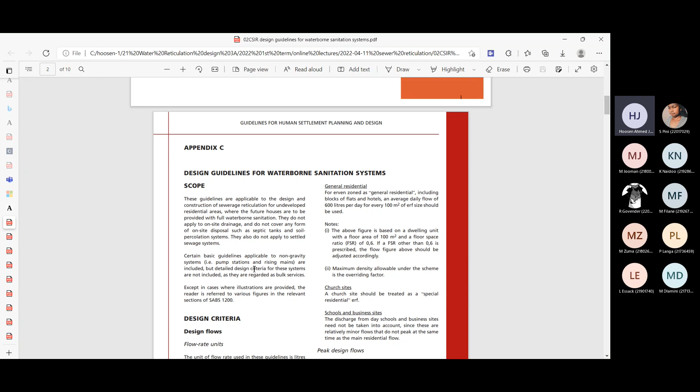On the Moodle website, you do have the full Red Handbook for the CSIR guidelines. If you want to read the remainder of it, you can go through it. The sections I've omitted, when it comes to sewer reticulation, are about the level of reticulation that's provided, which may vary. You could have, for example, pit latrines, septic tanks, or proper sewer reticulation systems like the ones you are going to study.

That's where we have waterborne sewage treatment, basically waterborne sewage reticulation. In the pit latrine, that's a dry system, used where you do not have proper sewage treatment plants or facilities, or there's no water supply - then that's inevitable and has to be provided. It does have its drawbacks.

We've all heard about incidents at schools where things have gone horribly wrong with septic tanks. But the guidelines for the construction of septic tanks, the sizing, and everything is provided for in the CSIR guidelines. We're not going to be studying it in this module, so I've left it out.

In a similar way, for example, you may not have a sewer reticulation network - you may be living in a rural area or somewhere where you have access to borehole water, but don't have a sewer reticulation system or sewage treatment plant. In those cases, you might have a waterborne sewer where you utilize what we refer to as septic tanks and soak away pits.

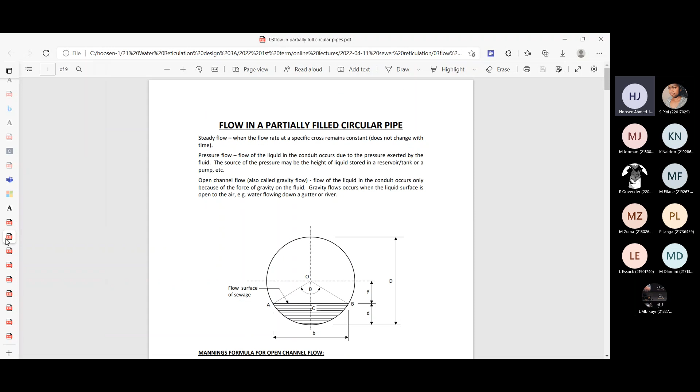So the depth of flow - we first want to work out when we get to the peak flow. This paragraph tells you that you're going to design your full flow. So you'll work out what your design flow is, and then you'll multiply it by 15%, adding 15% more because in a sewer reticulation system it is common during a storm event. So you'll design your system, work out the maximum flow, and size a pipe for that.

But it commonly happens that during a storm period, you do get some infiltration of stormwater into the sewer reticulation system. We never ever design our sewer reticulation systems to carry stormwater - that's an absolute no-no, one would never do that. You do not want to contaminate stormwater with sewage. Stormwater has far fewer contaminants in it.

It's cleaner water, so you wouldn't want to contaminate the clean water with sewage water. Sewage water has bacteria and dangerous viruses and various other things in it. So we would never ever mix stormwater and sewage - that's an absolute no-no.

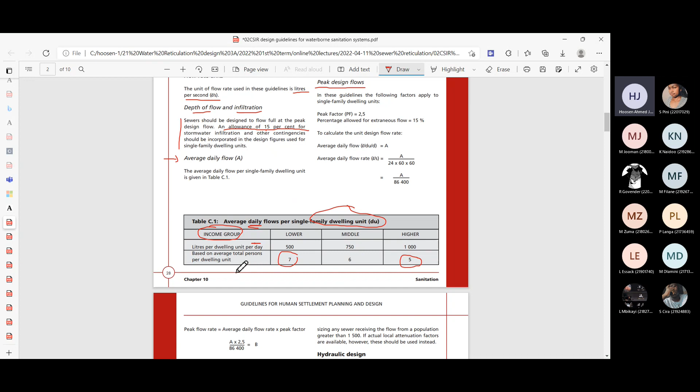So this table is an important one - this is per residential dwelling unit. Then you also get consumption from other sites - it's not only residential dwelling units that use water. You also get sites like schools and business premises that use water and have sewage outflow, and also church sites and maybe factories and industries and things like that.

When we calculate the peak design flow, the important thing to remember is we will not count the flow from schools, business sites, or church sites, unless we have some exceptional information about how those zones or properties are used. The reason is that we're designing for a certain peak flow.

That peak will occur early in the morning and in the evening, when people are preparing to go to work and when they return home. During those peak periods, there's usually no one at school or very few people, and no one at the church site. That's why we do not combine those flows from those areas with the peak flow we're designing for.

Even in this table, you see it's just for dwelling units. No information is given about schools and their size. There are other guidelines for that information. For example, if you're designing the reticulation system within a school, there are SANS codes of practice you can use, based on the number of pupils, classrooms, and various other factors, to work out the flow in that particular school.

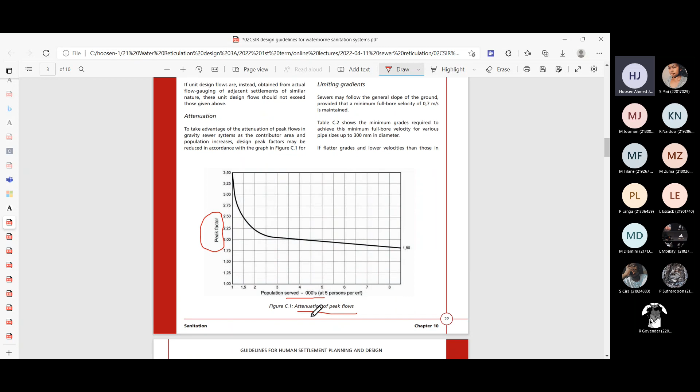This tells you why, for the residential unit in this table, you're given the population per household: 7 for low income, and 5 for high income, because you'll have to work out the number of people you are serving in that particular township, or by a particular pipeline, before you can work out the peak factor. That's where we need the second row in this table, and we will then calculate the peak factor from figure C.1.

Coming back to the peak design flow, to calculate the peak factor we need the average daily flow, which will be in liters per dwelling unit per day. That is what we read from table C1. Depending on how many dwelling units we are serving by a particular pipeline, and depending on the income groups—it may be multiple income groups—we multiply appropriately to get the total liters per dwelling unit per day.

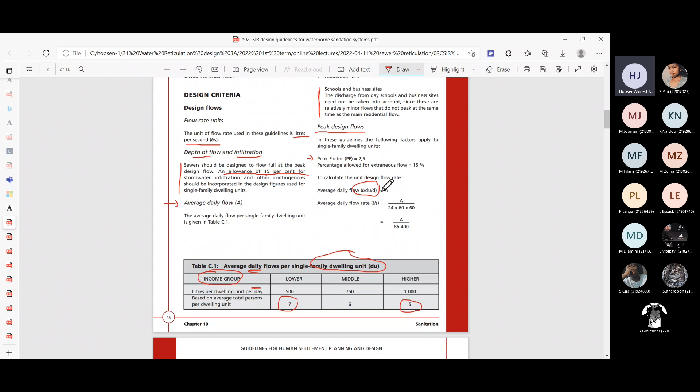Then you divide that figure, which is for the full day, since our design unit is liters per second. So we need to convert that to seconds. In a 24-hour period we have 86,400 seconds, so that's why we're dividing by 86,400.

Right, so that's what we will do to convert that to liters per second. Once we've got that value, that will be our average daily flow, and this will be in liters per second.

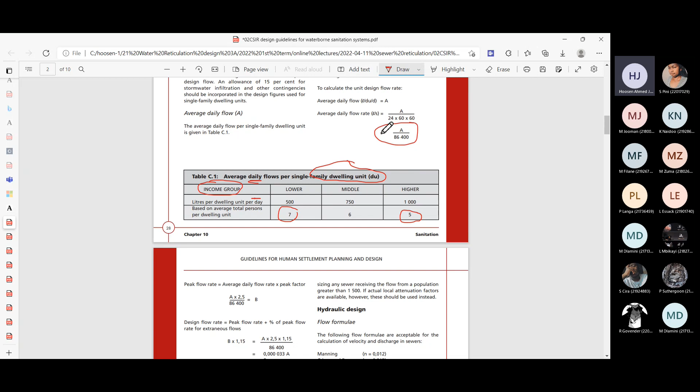We then go to calculate the peak flow rate, which means we then have to multiply by our peak factor.

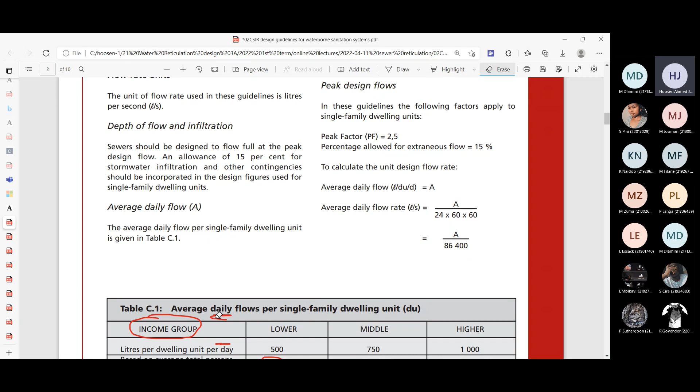Sorry, may you please go back, sir? I just want to see the part where you were talking about that A value. So to get that A value, average daily flow, let's say we had two low income houses. So what would be our A value?

1,000 liters, because it's 500 liters per house for low income. So if, for example, you had one low income and one middle income house, it will be 500 plus 750, so it will be 1,250 liters per day, like that. That's how you get that A value. I'll go through a tutorial example just now, and then you'll see it coming out in the example.

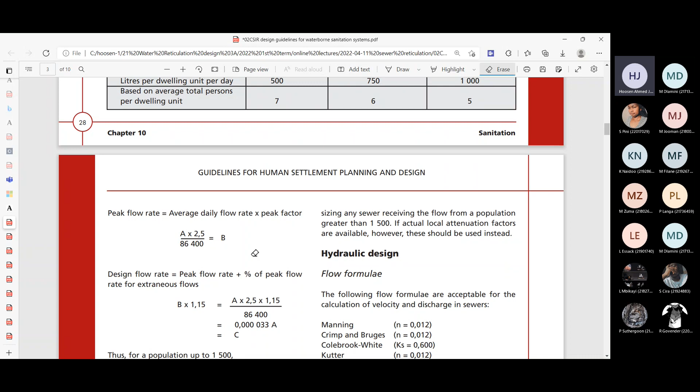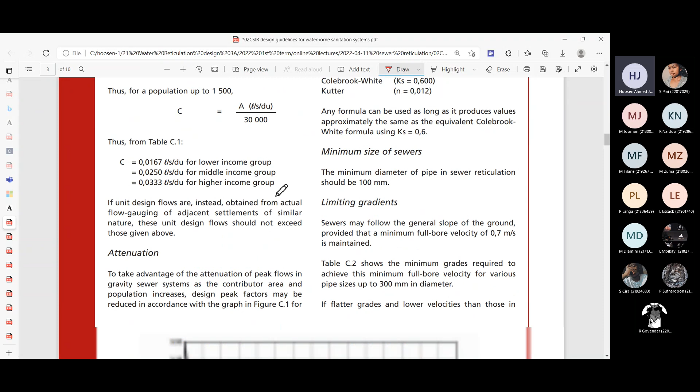Once we've calculated the average daily flow rate, we will then multiply it. The procedure is given to you in this guideline. You can then calculate the peak flow rate, which is simply your average daily flow rate multiplied by the peak factor. The peak factor you read off from Figure C.1, depending on the population you would calculate.

So we will then multiply by peak factor, and then we add another 15% for stormwater infiltration. Now there are certain instances where it's not possible to get stormwater infiltration, depending on which area of the network you are serving. So if it's not possible to get stormwater infiltration into your network, then you wouldn't design for that, you wouldn't add the 15% for that extraneous source.

But for most townships, in most applications, 95% of the applications, there will be stormwater, so you will allow for this extraneous flow. You then take your peak flow rate and multiply it by 15%, and then you get your design flow rate, which is C over here. So that is the flow rate for which we will design our pipeline.

Right, so this is the next paragraph that you see here. This is just for a population example of 1,500, and you're given an example. You can then work out what the flow rate in liters per second is over here, and you can go through that exercise and check it, and you'll get that.

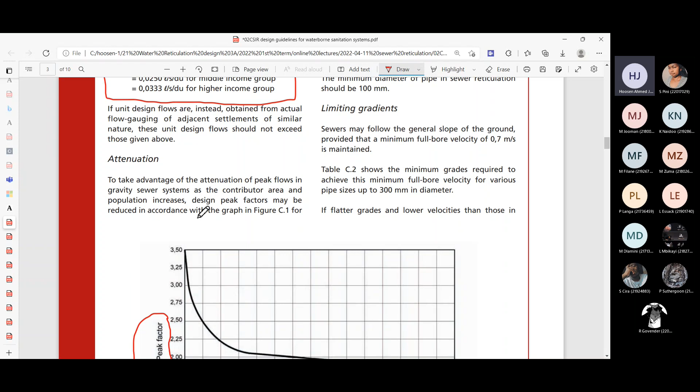Then we do not have an attenuation system. An attenuation system is where you have a sump, for example, where you collect and then you would have a pump or whatever, so you can ignore the paragraph on attenuation systems. The flow formula, you're given the n values, and you'll notice that for our design in this particular module, we'll be using the Manning equation. So that's the equation we will consider.

In the actual design situation, if you want to use some of those other formulas, you also would use it. Some design officers would use those, and as you go down, they become more and more accurate. But the Manning equation is good enough, because no one actually knows the exact flow rate that's going to occur in a pipeline. Humans are humans; one day you may use a little more water, you may spend a little more time in the shower than the next day. So it is by its very nature an approximate procedure, the design of it.

But you'll notice, just something I want to point out: the Manning coefficient is given in these guidelines. Now if you're using a new pipe, you might have a much lower Manning coefficient, but we would not use that, because remember you're designing for maybe a 50 or 60-year period. The condition, the internal condition of the pipeline will change as it ages. After a few years, you will develop like a slime on the inside of the pipeline, so that will actually be the surface of the pipeline in a few years' time. That's why the guidelines specify to you what N value to use.

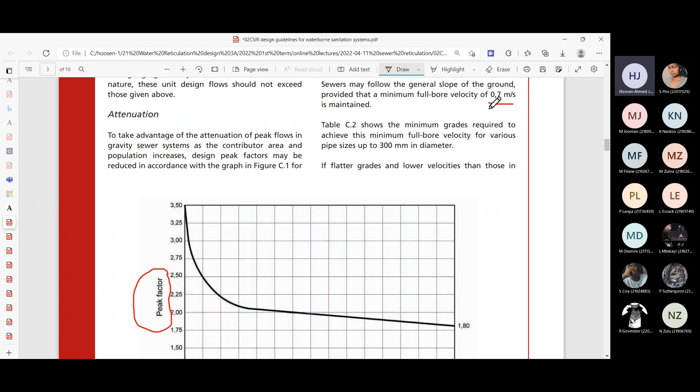Different countries and different guidelines specify this minimum velocity differently. You'll notice the term full bore velocity - so it's not the actual velocity in the pipeline. Why is that? What's this term of full bore velocity? This is when the pipe is running full, right? It's still gravity flow, not pressure flow. It's still under gravity flow, but we're assuming when the pipe is full, what will be the velocity then?

Now, we have open channel flow in our pipe, and sometimes we have a minimum diameter for our pipe. So sometimes in our design situation, even with the peak flow, our pipe might only be flowing quarter full or half full. If it's like that, if it's not flowing full, then you'll have an actual velocity that is different from the full bore velocity.

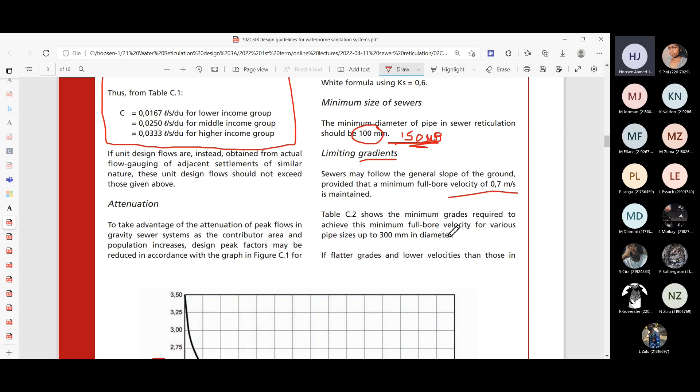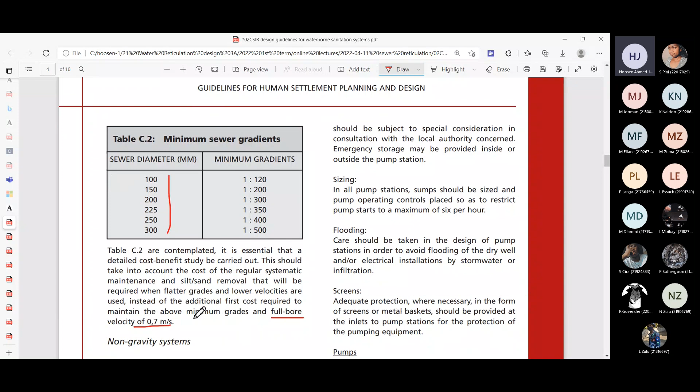Because of this, to maintain that minimum full bore velocity, the codes will usually specify a minimum grade for the pipeline. You'll find minimum grades specified here in Table C2 for different diameters of pipeline. This is just to assist you, so you know what sort of grade line you're looking at. If you work it out, you'll see these are all based on achieving a full bore velocity of 0.7 meters per second.

Okay, so once we've got our peak—excuse me, my apologies, I just needed to clear my throat.

Once we've got our peak flow, let me just clear out the clutter here to outline the design procedure. I'll go through it with an example now, and you'll see how it all comes together.

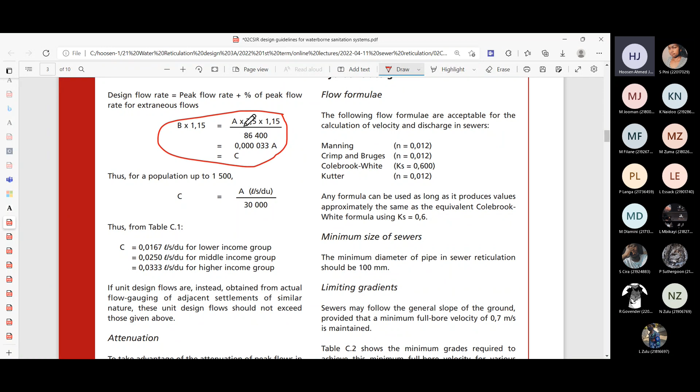Once we've determined our peak flow, we'll multiply it by that 15%. So we've got our peak flow, we'll then have to select a pipe size, guessing the pipe size, and then check the velocity that we can maintain by looking at the gradient we need in our pipeline.

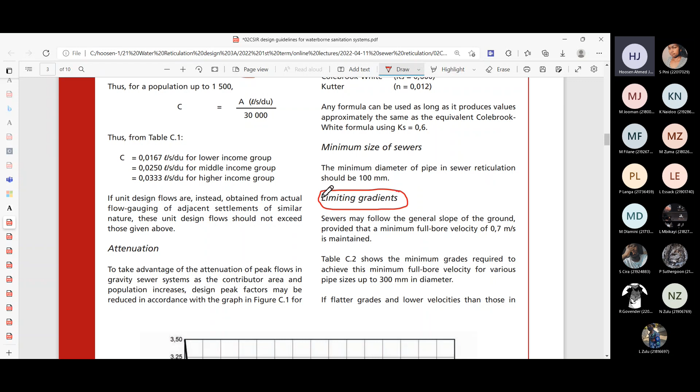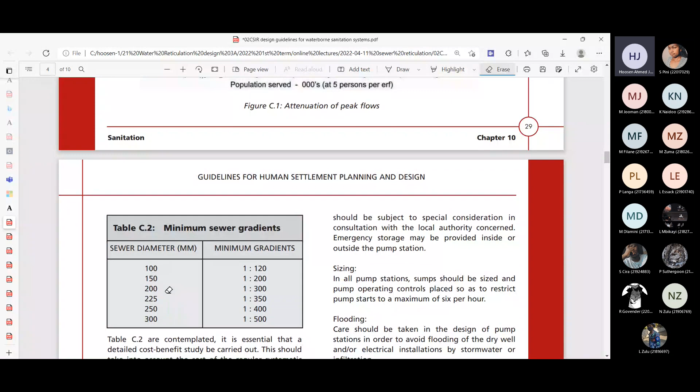Now, because we have gravity flow, there are limitations on the gradient. It depends on the terrain of the ground. If you have very steep sloping ground, you cannot lay it as flat as you may have liked; you'll have to lay it at a certain gradient. So we will check the gradient of the pipeline, and as we proceed through this topic, this will come into play a lot more when we look at long sections and things like that. This table also provides us with guidelines for that.

Now, the guidelines also go on to non-gravity systems. Non-gravity would be a pumped pipeline, and you'll see the word rising mains, referring to the pumped line. We're not going to concentrate on this, but you can read it up—the information is here, it's available.

What I wanted to stress for you here is the maximum velocity that we have in the pipeline. You pick it up from here, 2.5 meters per second. Notice that the earlier section only specified the minimum velocity of 0.7 meters per second, but we will also select the grade of our pipeline such that the maximum.

Excuse me, my kids are making a racket in the background. I just need to go and tell them to keep quiet. Just give me half a minute.

Okay, I'm back online, my apologies for that. You must have heard the racket in the background—my children were playing there.

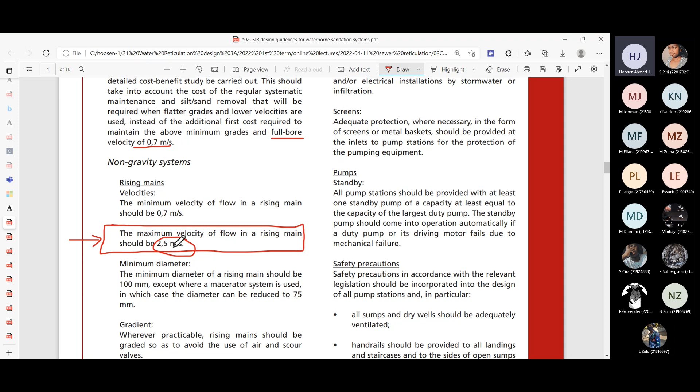Okay, so I was talking about the velocities. We would also be careful with regard to a maximum, and normally for sewer reticulation, we set the maximum velocity at 2.5 meters per second.

The reason behind having a maximum velocity in sewer reticulation design is that if you exceed a certain velocity, the water shoots past the sediment in the flow, so the sediment gets left behind. The water wants to move so fast the sediment cannot keep up, so you get sediment settling out from the flow into your pipeline, and you can get blockages occurring where the shooting water overtakes the flow of the grit. That's one of the reasons why we set a maximum velocity.

Another reason for having a maximum velocity is that if the grit can manage to keep up with the water, you'll develop a scouring effect on the pipeline—like sandpapering the inside of it, because the grit has so much momentum it scours the pipeline, as though it's getting sandpapered inside, reducing the life of that pipeline.

So those are some of the reasons why we limit the velocity of flow in the pipeline—a maximum of 2.5 meters per second, and I'd say 2.5 meters per second is still a high velocity, so ideally one would try to keep away from that.

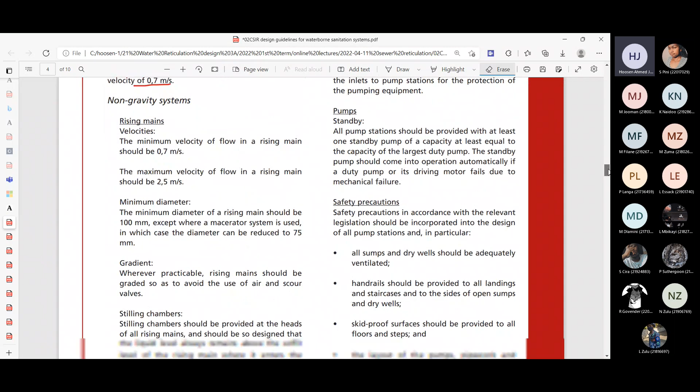The rest of the content you come across here refers to pumped pipelines. Within this section, the non-gravity system, you can read through it, but it refers to a pump system. We're talking of gravity flow, so I'm not going to delve further into those systems.

For the actual design, you can read up to about the minimum depth of cover—it's important. That's the minimum cover to your pipeline. When you talk of cover, they're talking about the cover to the outside of the pipe, so just bear that in mind.

So if you have a pipe in the ground and the ground level is somewhere above it, they're talking of that distance above the pipeline as the minimum cover. That's what we refer to as the cover to a pipeline—the amount of soil above the top of the pipe.

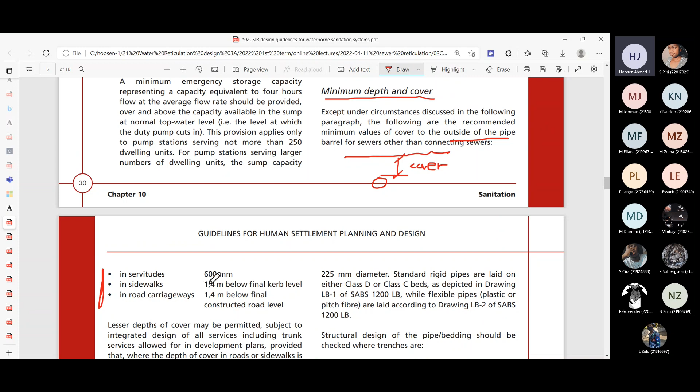In servitudes, where we would not have vehicles within the property—no trucks or cars driving over those areas—we'll try to achieve a minimum of 600mm. If you cannot get 600, then we need to provide some protection above the pipeline.

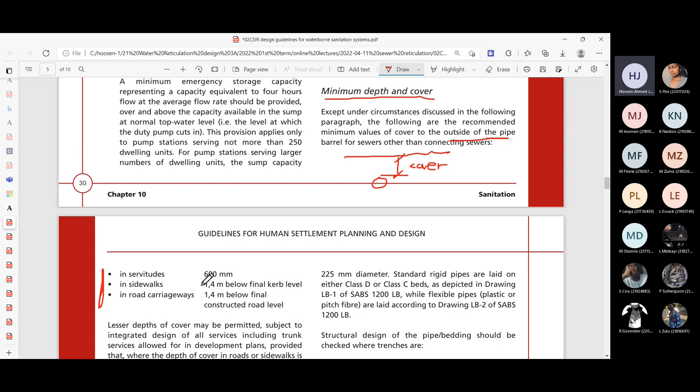In sidewalks, 1.4 meters, because vehicles do drive onto sidewalks. Within the road's carriageway, because you have trucks and cars driving on the road, there you'd also have a minimum cover of 1.4 meters. It's the same for roads and sidewalks, because vehicles will drive onto a sidewalk, so you need the same protection there as for a road.

These are some guidelines—you can read through the rest of this chapter. The diagram below shows that if you cannot achieve the minimum cover specified, you would then need to provide a concrete slab to give protection to that pipeline, especially in roads or sidewalks.

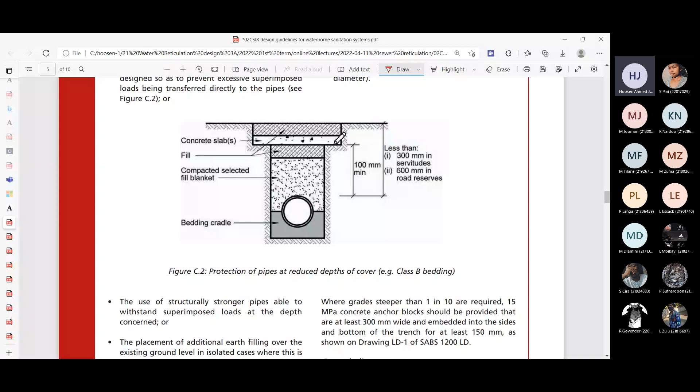Read through all of this. It's information you should know when you go out into industry and become more involved in the design.

You'll come across that, if a particular municipality does allow for curved alignments. In my last lecture, I told you we always lay the pipeline straight. So we don't lay a pipeline curved. What do we mean by that? Curved pipeline? I never actually told you that.

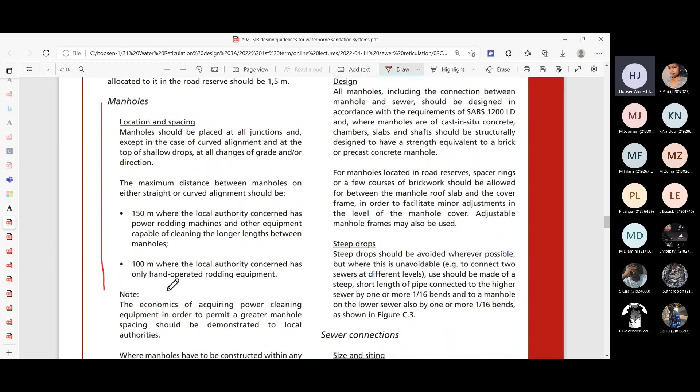The rest of this, I'll come back to manholes in the next lecture and discuss it in quite a bit of detail, what goes into a manhole and how they serve their purpose, and what's in the manhole. So I'm not going to discuss it now in this lecture.

I want to move on to the actual design example, where you see how you select a pipeline and calculate those peak flows and things like that. For the actual example, I have a tutorial for you and I'll walk through this with you.

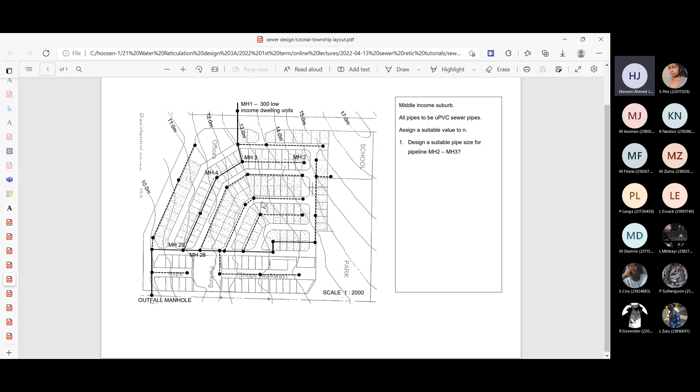Let's say this is the same diagram that you had in those notes, the first set of notes I went through yesterday, explaining to you about the positioning of these pipelines. Let me see if I can enlarge it. We have a township network here, a sewer reticulation network, and we have all these pipes that we are proposing to lay in the ground. For this particular tutorial, let me zoom out a bit.

You're given some information about this particular suburb. You're told it's a middle income group - you see that on the right hand side of the screen. That gives you information about the flow you're going to have to calculate. You're told the pipelines are UPVC pipelines, with a suitable Manning coefficient N value, which I have spoken about. It will be N equals 0.012.

You're asked now to design a suitable pipe size for this particular pipe, from manhole 2 to manhole 3. So you identify in this network - I've labeled those manholes, manhole 2 and manhole 3 - and we want to now design that particular pipeline.

The procedure is: as you move along the length of the pipeline, the flow in the pipeline will increase. At the start of it, towards the beginning of the pipeline, it's only serving 2 or 3 or 4 properties. If you look at it around that point, at most you'll have the flow from 4 properties occurring into the pipeline at that point.

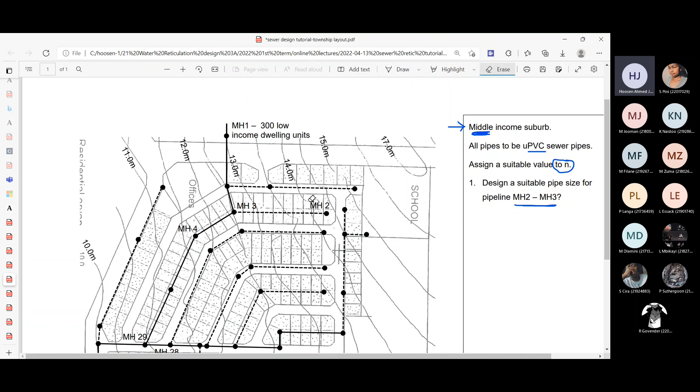The number of dwelling units would depend on the town planning zoning, so you'd need some information about that. Since that's not given, we'll assume one dwelling unit per property. If you have a larger property, in a middle or high income area, you might have two dwelling units because sometimes they put up a granny flat or outbuilding. That information would come from the municipality and town planners, who tell you what the area is zoned for. From the zoning, you can pick that up. For now, we're assuming one dwelling unit per property. Like I told you in yesterday's lecture, one property is that rectangle you see there, so one house is built on one property.

So now we have 20 dwelling units, and we're designing this pipeline for 20 dwelling units. This isn't part of the solution, just a discussion to help you understand. If you took the next pipeline, from manhole 3 to manhole 4, we're adding another 10 properties. So if you designed the pipeline just before manhole 3 for 20 dwelling units, the pipeline from manhole 3 to manhole 4 would be designed for 30 dwelling units, since it's actually serving 30 dwelling units from where I've drawn this blue line.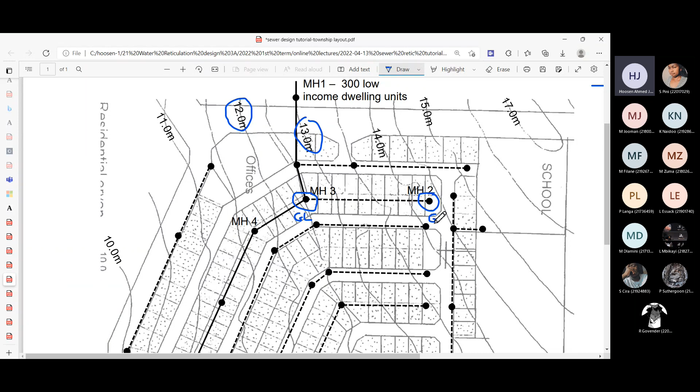Ground level at manhole 2, and ground level at manhole 3. So how do we go about the calculations? Let's see, I do have the memo for this particular example, and I just want to briefly go through this with you. Let me enlarge this on the screen so you see it, and I'll flip through between the screens.

So we're designing between manhole 2 and manhole 3, and I mentioned that there's 20 dwelling units that we have between manhole 2 and manhole 3. So to calculate the flow, you'll see I've now, let me get my red pen out here again. Is there a query? Somebody asking a question?

No, okay. So we're designing the pipeline between manhole 2 and manhole 3. We note that we got 20 dwelling units, right? So 20 dwelling units. The question mentioned that it was middle income. If you look at the top here, I told you on the right hand side, we're designing it for middle income. So middle income there.

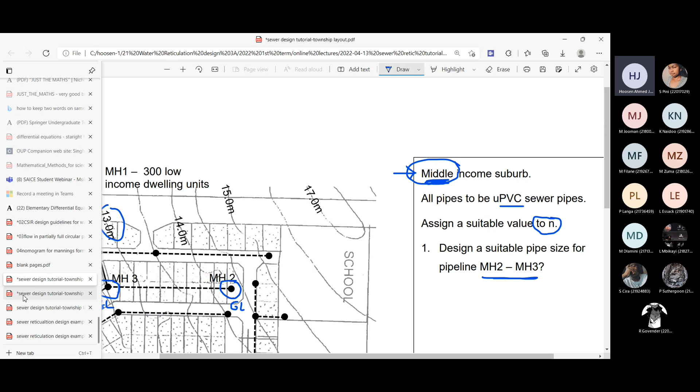If we go to our CSIR guidelines, we will go back to those guidelines and look at the table here. We see for middle income, that's our area of interest on this table, table C.1, 750 liters per dwelling unit per day. So we have the 750, and the per dwelling unit, we're assuming 6 people.

Let's come back to our memo, and you'll see that's it over there. So 6 persons per dwelling unit and 750 liters per day. That's our input into our design. We've already read off from the CSIR guidelines, from those tables we have that. The population that we will serve: we now have 20 dwelling units, and we have 6 people. So 6 times 20 will be 120 people. That's the population that we're serving for that particular pipeline, 120 people.

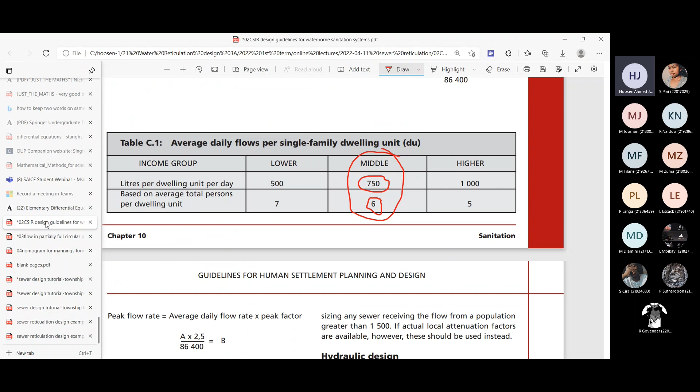If we have a population of 120 people, we can then work out our peak factor. And from that table, the peak factor works out to 3.5. Let's go back here and look at that, and confirm that it's 3.5.

So you see the population that's here, and again just notice that it's in thousands over here. So the numbers that you see at the bottom here are thousands. So that number 8 is 8,000 people. This number here, for 1.5, that's 1.5 thousand, 1,500 people. So in our graph, we said we have a maximum population.

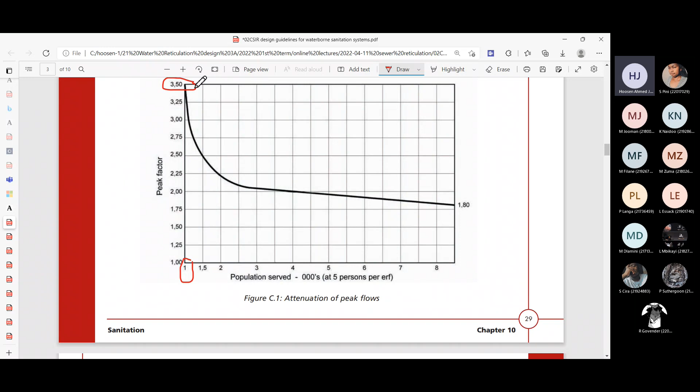What was that now? Let's go back here. We have a maximum population of 120 people. You can see that it's a very small amount in terms of this graph. So the maximum peak flow that we would have, this is 1,000 on this axis here, and that would be 3.5. So that's the maximum peak factor that we would use is 3.5, and the minimum peak factor that one would use would be 1.8.

So our peak factor is going to vary between those two numbers over here. That's where the 3.5 has come from, because the graph doesn't proceed to less than 1,000 people. So that's where that number of 3.5 has come about from, where the 3.5 peak factor came.

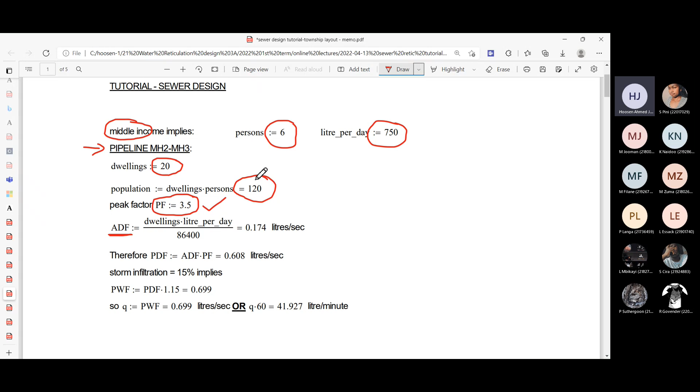The average daily flow, you can see the abbreviation we're using, would then equal to the number of dwelling units that we have. Let me just remove all that extra writing over there. So the average daily flow would be this: we have 20 dwelling units, and each dwelling unit uses 750 liters per day. So 20 times 750, and that's per day, the total amount you can see per day.

We want our average daily flow in liters per second, and there are 86,400 seconds in a day, so we're dividing there, and we end up with 0.174 liters per second. That's our average daily flow. We then multiply it by the peak factor, and we get 0.6 liters per second, because we're multiplying that 0.174 by that 3.5.

So that's why you get a significant increase - it's 3.5 times larger. We would then increase that number of 0.608 by 15% to allow for stormwater infiltration. So our peak wet weather flow, that's why we say PWF, would be 0.699, or roughly 0.7 liters per second. The unit isn't shown here, but that's what it would be - liters per second. That's what we design our pipelines for. That is our design flow, 0.7 liters per second.

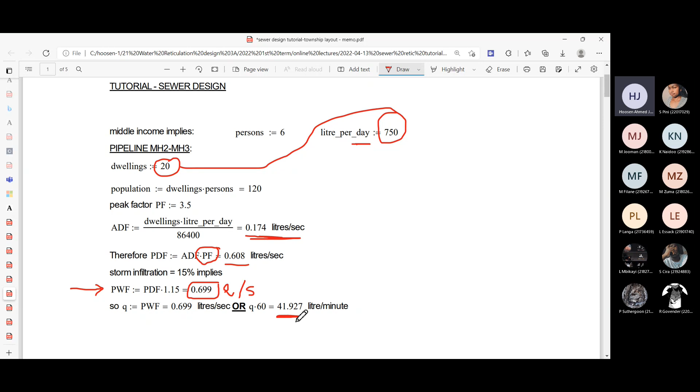This is only being done in this tutorial because we're going to need to guess a pipe size. To give you some guidance for guessing a pipe size, I have supplied you, and you'll find this again on Moodle, with this nomograph. It's called a nomograph, and it helps you select a pipe size. At the bottom here you've got the slope of the pipeline. On the right-hand side you have pipe diameter sizes, and on the left-hand side you have various discharges, or the flow in the pipeline, given in liters per minute. That LPM stands for liters per minute - that's the reason in the tutorial we converted to liters per minute.

I have actually recently come across, in one of the catalogs, a South African catalog, the same nomograph but given in liters per second, which I will upload for you in Moodle. So if you have the liters per second one, you don't need to convert the flow to liters per minute. But this one is in liters per minute, that's the reason we converted.

You also need to note it's a logarithmic scale. If you read the numbers, for example once you reach 1,000, the next isn't 1,200 - it's 1,000, 2,000, 4,000, 6,000. When you reach 10,000, the next number, that 2 stands for 20,000, 40,000, 60,000. That's the way you read a logarithmic graph. So the vertical scale is logarithmic; the horizontal scale is not logarithmic.

So we calculated our peak flow, and then we come to this graph, and we then select a particular pipe size. But in the tutorial, before that, we need the slope of the pipeline, because when we look at this nomograph, you can see at the bottom axis, you have to know what's the slope of your pipeline.

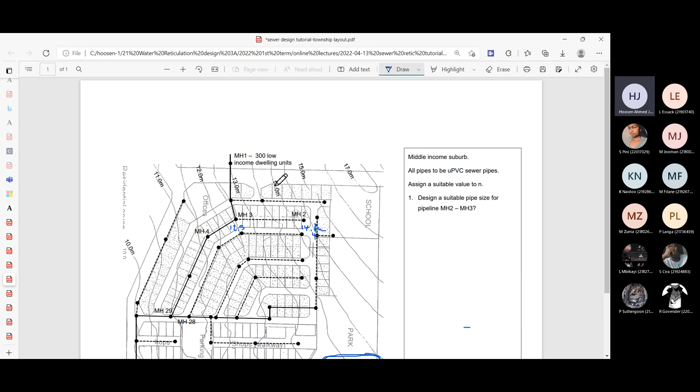You'll know how to use your scale rule. So you take your scale rule, go to the 1:2000 scale, and then measure that distance from manhole 2 to manhole 3. That's how you determine the distance, and the difference in ground slope you'd get from the difference in the contours over there. So using your contours, you'd have to interpolate and then work out the difference in ground levels.

Coming back to the scale rule again, if your scale rule says 1:20, you can still use it. You would measure from the 1:20, then multiply it by 100 times, because 20 times 10 would give you 200, 20 times 100 would give you 1:2000. So if you don't have a 1:2000 scale but you have a 1:20 scale, which is a common scale, you can still use it to measure that distance between those manholes. That was just by the way - you should know that already from your drawing module.

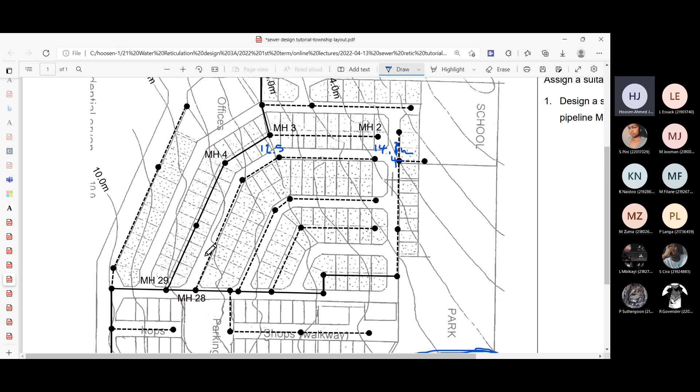So we then have the distance. Let's come back to our tutorial system. When we measure those distances from the scale rule, we get a length of 88 meters. And the difference between the ground levels using those contours was 1.9 meters. So the slope will be equal to the fall divided by the length, and that gives you a value of 0.022.

But notice that normally when we talk of the slope of the ground, we don't give it in this format - that's not the common format. We would normally give it as 1 in something. If I told you that the slope of the ground is 1:10, what does that mean? It means that for every 10-meter horizontal, the ground rises by 1 meter - so that's 1 meter rise in 10 meters.

Let me draw it in a different color. This blue line is actually the sloping line - that's what we're specifying. This blue line I'm now drawing is at 1:10, that's the slope of it: 1 meter vertical and 10-meter horizontal. So that's your vertical versus your horizontal. We normally specify a slope like that.

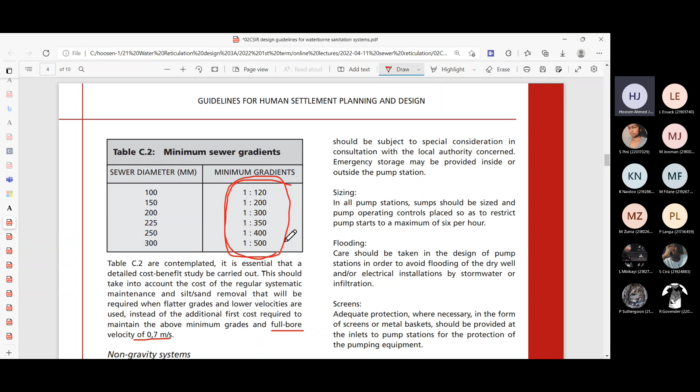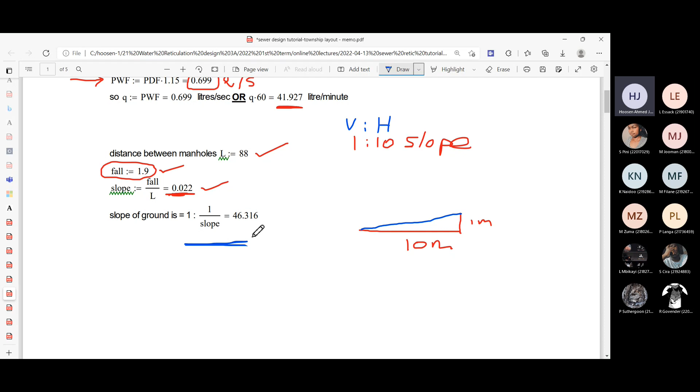You can see 1:something like that. So that's how we normally specify gradients of pipelines. We will also put this information on our long section, which I'll discuss in the next lecture. That's why we need it in that particular format, 1:something, and that's why we've converted it like that.

So we now have the slope of the pipeline and we got our peak flow. We actually converted that peak flow to liters per minute. So we have those two quantities: the peak flow per minute, and the slope, 1:46, roughly about 1:50.

When we want to use our nomograph, we go back to this nomograph and look at it over here. I know this particular nomograph is not so clear, but in Moodle you'll find a much clearer one. The one in the tutorial solution is not so clear, but the one I'm using here on screen is much clearer. In the memo, you cannot read the pipe diameter so clearly, but I've got a separate file just by itself, and here you can read it clearly.

Coming to this nomograph, just to show you how to read it, you see here various slopes at the bottom axis: 1 in 10, 1 in 30, 1 in 60. We are at 1 in 50, so that's 1 in 30, that's 1 in 40, 1 in 50. We've drawn that in blue, the vertical line on our graph.

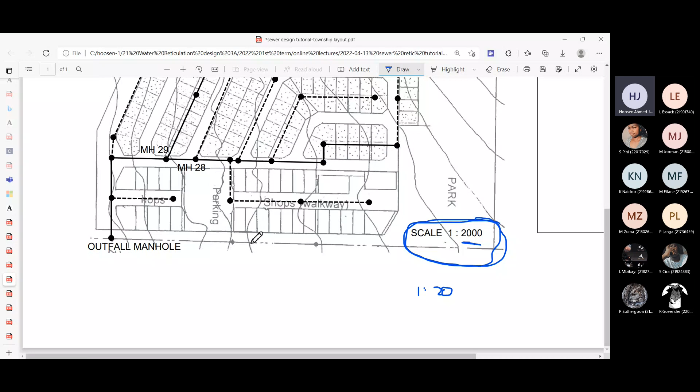From our solution in the tutorial, let me go back down. Tutorial one, this is the one we worked out to 42 liters per minute. I just want to delete all this clutter here so we can see the relevant information more clearly, what we're actually working with for that nomograph.

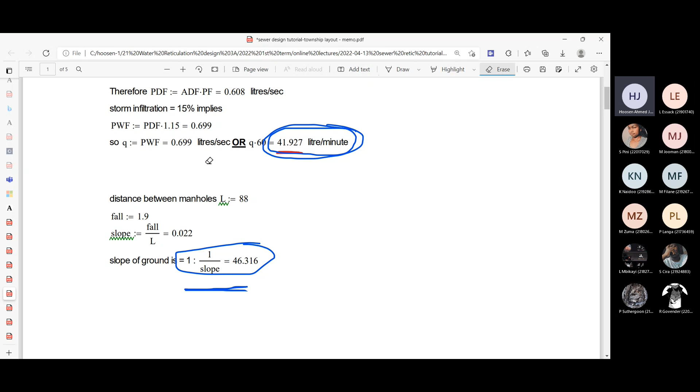So these are the two important figures we're looking at: the slope, roughly around 1 in 50, and our peak wet flow, or peak flow, is roughly about 42 liters per minute. When we go to this nomograph, that was the 1 in 50 slope, and roughly 42 liters per minute.

On the vertical graph we're going to try and find 42 liters per minute. We're starting off with 100, so it's somewhere below this point. Even if we worked with 100 liters per minute and intersected here, we can intersect that line at roughly that point over there.

Now if we used a 100 diameter pipe, you can see here that a 100 diameter pipe can work for that particular flow. But we're not going to use a 100 diameter pipe because our minimum pipe size is 150. So that's what we will target over here.

Now if we're using a 150 diameter pipe, what this nomograph tells us at a slope of 1 in 50, we see where it intersects that pipeline, around that point over there. So I will now get rid of this. Remember, because we're not working with full bore flow, it's going to be partially full.

If we look now at this nomograph, we came - oh sorry, where did I delete this bottom one? That's our 1 in 50 slope over here. At that point we had the 1 in 50, just to show you.

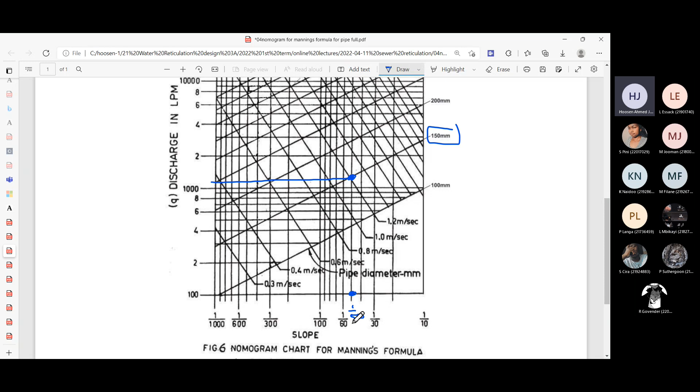What's nice about this nomograph is it also gives us some idea about minimum velocities. The lines that go across in that direction are the velocity lines.

They're written at the bottom and the top. If you look at where our blue dot is for the 1 in 50 pipe, we see that we can achieve roughly about 1.2 meters per second. That will be the velocity - the actual velocity we can achieve in that pipeline.

Our full bore velocity will usually be larger than that amount. So we're happy with that, being over the 0.7 meters per second minimum.

That same 1.2, if you read it across from that point, you'll see if you continue reading those lines, from 1.4 upwards it's written on top, and from 1.2 below you see it on the lines below there. This is what helps us select.

So I know for sure, looking at this nomograph, a 150 diameter pipeline is what I need. It's more than adequate for me. Even a 100 millimeter pipeline will work.

Just for argument's sake, if I had to look at a 100 millimeter pipe, it would intersect at that point - my 1 in 50 slope intersects the 100 millimeter pipeline at that point.

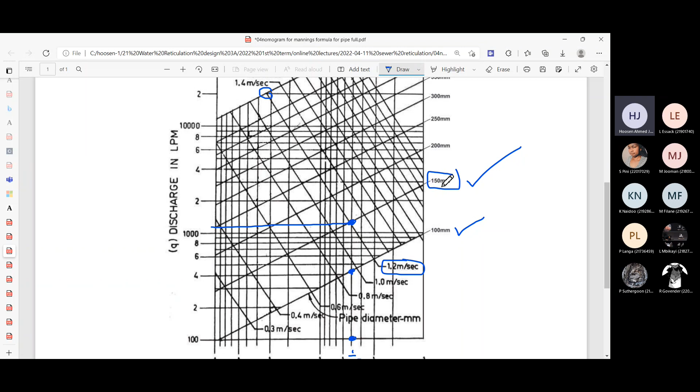Let's go back to our solution. So we come back to the tutorial solution, and based on that nomograph, you can see I've included this nomograph, and I've put a discussion explaining what I've just explained to you now. You'll find all of this discussion here.

Just bear in mind this nomograph is based on an n value of 0.013, whereas our guidelines say we must use a value of 0.012. So there is a slight adjustment for that, but it's not so critical.

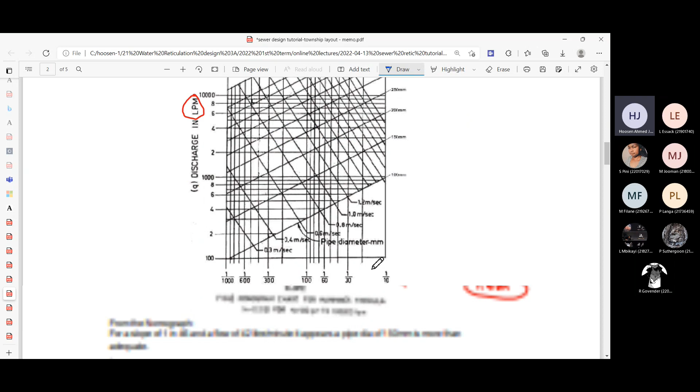This is our preliminary selection of a pipeline. We're still going to do calculations to check it properly, and we can see that the 150 diameter pipeline works well for us. I've explained that to you.

So now we decided that for that 1 in 46 slope, and for that flow of 42 liters per minute, our peak flow, we now use a 150 millimeter diameter pipe, and now it looks like...

I don't know why my computer is actually dimmed out. Just bear with me, please give me a minute. I just want to see what's happened. Oh, one of my kids at some point in the morning unplugged my power supply. Just give me a few seconds while I plug it in again before my computer switches off. Alright, hopefully that should resolve things. Okay, my apologies for that, I just had to plug in the power supply to my laptop as it would have switched off.

Right, so you can see again I've spoken about all of this over here. Now, according to the nomograph and according to the guidelines, 150, but a UPVC pipeline does not come in an internal diameter of 150. It will be 160. So that's from a practical point of view.

Our UPVC pipelines - the manufacturers make them in a 160 millimeter diameter. So we will then work with a 160 diameter pipe, and now we will do the checks.

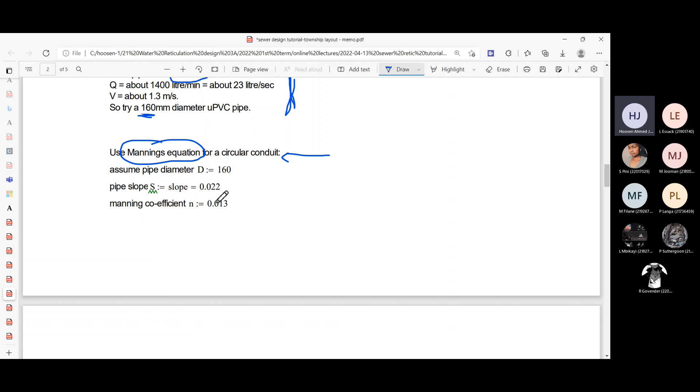In the tutorial here I've used 0.013. Maybe in the question did I specify? I just said use an appropriate n value. I just want to check here, in this particular example we just said use a suitable value for n. So in this particular one, I've used a Manning's n of 0.013.

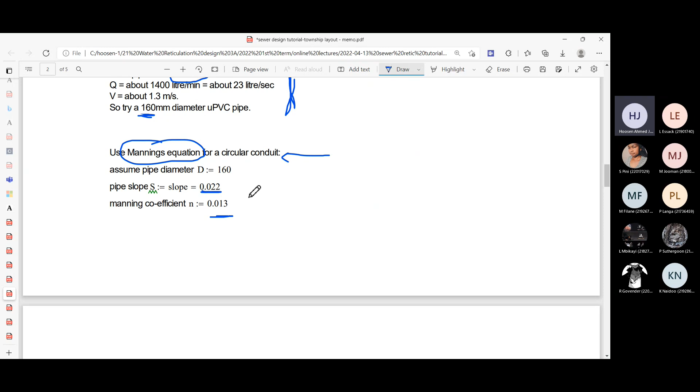You'll put in the one in what we said, not 1 in - you just substitute that number, 0.022, 1 divided by that 46. That was the slope we worked out earlier. Just to go back here, that's the value of the slope we substituted from what we obtained over there, and then we converted that into a 1 in something format. So that's what we're going to substitute in these equations.

We then see that we get a full bore flow of 26.59 liters per second and a full bore velocity of 1.322. This is greater than the 0.7, that is greater than the 0.7, so we're happy with that. Greater than 0.7, so we're fine with that value.

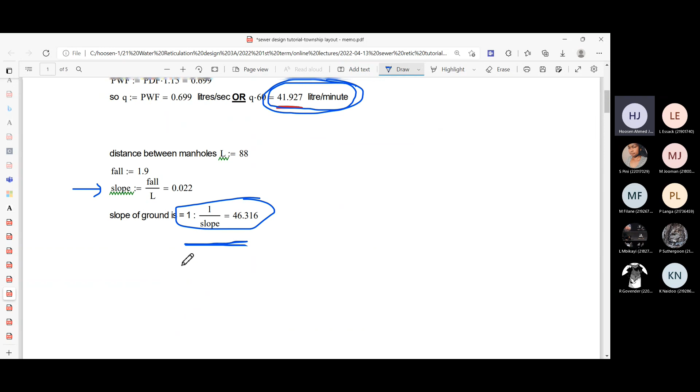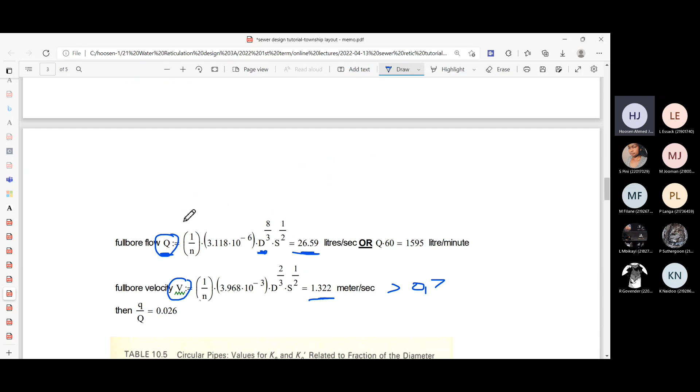Now our actual flow that we worked out, if we go back in liters per second, let's go back to our calculations over here. When we worked out the actual flow, our peak wet weather flow was roughly about 0.7 liters per second, something like that, somewhere around there - that was the actual flow. And our full bore flow we worked out over here was 26.59 liters per second. So we will then divide that actual value, roughly 0.7 liters per second, by this 26.59, and we'll end up with this ratio that we gave here of 0.026.

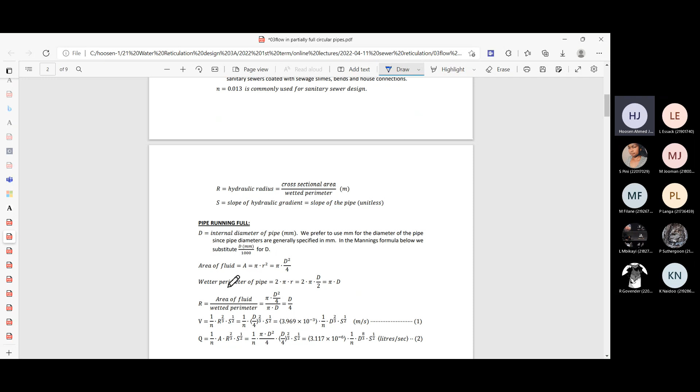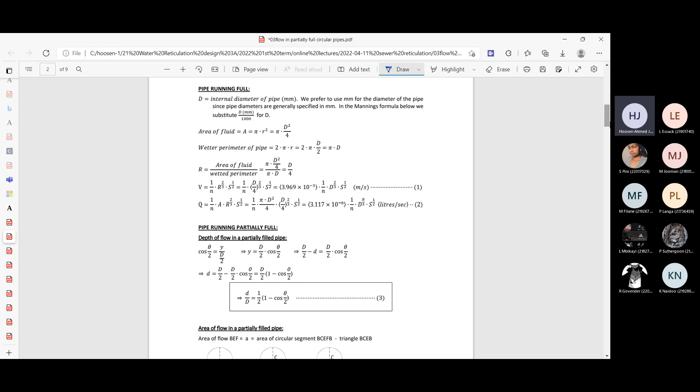Now why are we doing this calculation? This is where that second set of notes I've given you explains what the table and the graph I'm going to show you just now means. You can read it, study it, and you should be able to derive these equations in a test or exam situation - you could be asked some theory, so this is all part of the theory. If you study this whole set of notes, you'll notice we come here, just to show you, to this Q over Q - but you first got to do the previous calculations before you come to this.

This is that same ratio, Q over Q, and you can then, in this equation, solve for theta. Right, and once you've got theta, you can then go back and substitute into these equations here for V over capital V. So if you know what theta is, you can substitute for this, and you then calculate that ratio of V over capital V.

Now we know what the capital V is, actually the full bore velocity. So we would then be able to solve for the small v, which is the actual velocity in the pipeline.

Similarly, for the depth of flow, if you go back here, you'll see the ratio d over D. Small d is the actual depth of flow, so that with the hatch, the depth of this hatch, that depth there, and capital D is the diameter of the pipeline.

So if you know what theta is, you know what this ratio d over D equals to, you can work it out. And you know what the capital D is, that's 160, that's our pipe diameter. So we would then be able to work out the small d, and we know what the depth of flow is in our pipeline. Right, that's what we want.

So these are the actual equations. If you are using, for example, a spreadsheet, or you wrote a computer program, then you would require these equations here, which I've derived for you. And we will then see how we'll use these equations also just now.

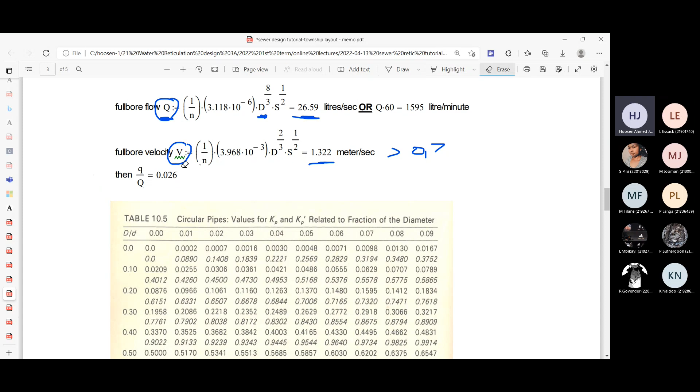So coming back to our tutorial solution, we now have this Q over Q ratio. So you can either use those equations, or those same equations are represented in this table here that you see, the values. So you can either read out the values from this table, or you could use the graph.

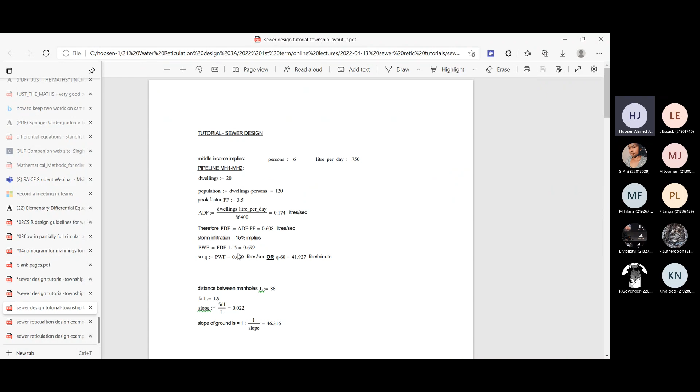Now, why is it not drawing? Bear with me, I think it takes a while for the PDF file to read that. I'm just waiting for it. So there is supposed to be a graph here after this. Okay, so I don't know, for some reason it's not opening it there. I'll just show you it, just to show you something. No, that's not what I'm looking for. Oh no, my Microsoft Edge has hung a bit. It takes, I don't know why it stalls for a few seconds, so you just have to bear with me. I need to go back to that normal graph. Try. Okay, coming back to this over here. I had this normal graph here. No, okay, yeah, the same. Okay, it's in this particular. Sorry, and this I got confused. I confused myself for a while.

Yes, I can't see your screen. Is there anybody else having that problem? Sir, it's back now. Is it back now? Okay, thanks for that.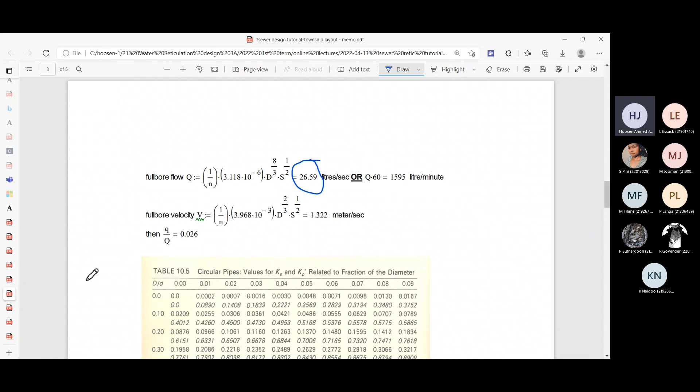If I go back to the solution, where is that? Let me open that file again. I did work out my capital Q, and that's the value of capital Q. So I can then substitute for the capital Q there, and I will get the value for the small q. Let me go back to the right diagram. So I can work out what my small q is, and that will give me the actual value.

So if I had 26 liters per second, and I multiply it by that 0.1263, that will give me the actual flow in the pipeline at that particular slope I had over there. I think I worked with a slope of 1 in 46, that's what we got over there. So for a 1 in 46 slope in the pipeline, that will be... it's 0.7 liters per second.

Then the actual flow — sorry, the full bore flow — was quite high, and that's the actual flow we get over here. So this is telling me that for d over D of 0.24 in a pipeline, my actual flow, if the full bore Q was 26 liters per second or whatever that was, will be Q times that capital Q ratio. I can now work out what small q is.

In the same manner, the italic value over there tells me that my small v over my capital V is equal to 0.6844. Let me write that properly: small v over big V is equal to 0.6844, right?

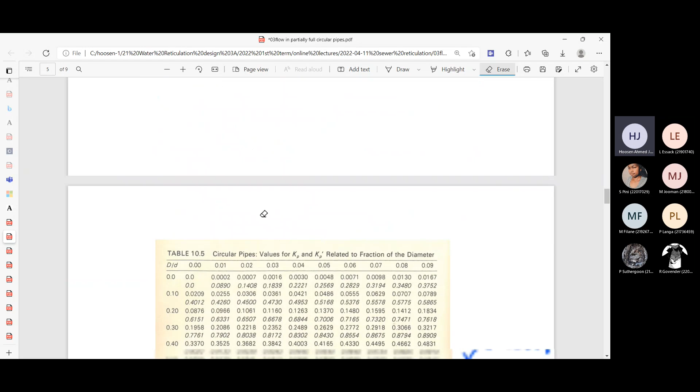So let's get rid of all this information from here. Now let me go back to the solution. Just bear with me, please, I keep swapping screens here.

Now we had this value. We worked it out just now, and I showed you that we know what the small q is, and we know what our big Q is. So we don't need to find that small q over big Q from this particular table, we're already starting off with that information.

So coming to this over here, we have this q over Q of 0.026. So what we do is we come into this table here and we look for the normal font where we can find a 0.026 or something closest to that value. So then I look here and I got...

0.0048, that's far away. Getting a bit warmer. I see 0.0209, that's quite close. Maybe if I go to the next one, 0.025, and that roughly rounds off to about 0.026. If you notice where my cursor is circling, when I look at that value there, I'm in that ballpark figure. That looks like 0.026 over here.

So this is my Q over Q ratio, which I have from my calculations done over here. So that's the one I want to read over here, so I know that's the box I want. I will then highlight this box here, so that's where I am in this table.

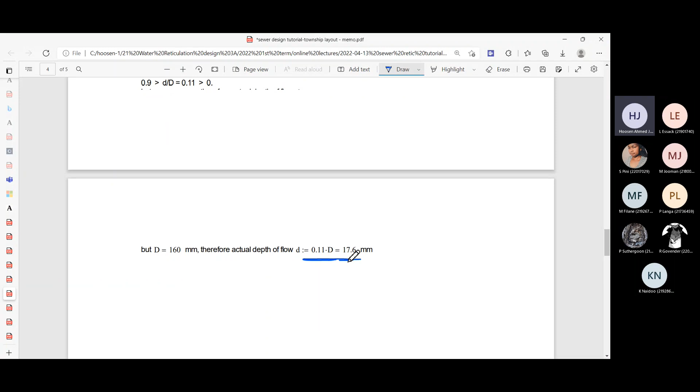Okay, now it's cut off. You can see the actual depth of flow is 17.6 millimeters over here - that's what it actually works out to. The 0.11 times the 160 millimeter gives 17.6. So that 0.11 value here, that's where it's come from over here. That's how I picked up that value of 0.11, you see it in those calculations there.

Now I also want to know - I got the Q over Q, I want to know the velocity, what's the actual velocity. So the italic value that I see there in that box for Q over Q, I had that 0.026, and that's how I selected that box.

And I see below that, 0.0255 or 0.026, below that the italic value is 0.4260. So that tells me that my small q over my capital Q for my pipeline is 0.4260.

And then I can work out my small q, what that is equal to. My capital Q is... sorry, my capital Q is not 160, the capital Q is what I worked out here, 26.59.

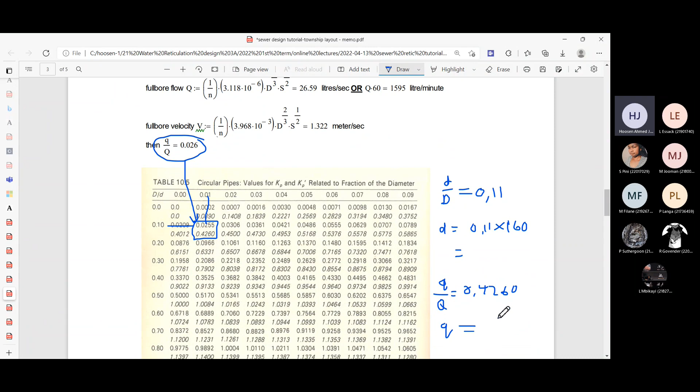So let me just delete all this here. So I based my Q over Q value on that, and from that I came and read this box here, and then from that box I was then able to read the d over D later. And now I read my V over V. Sorry, what have I done here now?

Okay, sorry, I had Q over Q for. My apologies, I've written this wrong. Yeah, that's what I was just wondering. Sorry about this. It's v over V, right? So no one corrected me on that.

It's a small v over capital V, and then I can see my small v is equal to this. So the small v over the capital V is 0.426 here. Let me draw a line so you'll see it. I've read that value there, 0.426. So that's the value I substituted, and that's the v over V.

I know what my capital V is. The capital V is 1.322. That capital V is what I'm going to substitute in this equation, and I can then work out what my small v is, and then work out the actual velocity in the pipeline. So the only unknown here is the small v on the numerator. I can then work out what the small v is, and that's done in the calculations below.

You can see that same 0.426, that was the v over V ratio I read from this graph, and I then worked out what my actual small v is. I could then work out what the small v is, and I worked out that v is equal to...

0.563. Now this is less than the 0.7 minimum velocity. Sorry, I haven't circled it nicely there, it looks like v. This is 0.426 times V, so the small v is actually that value there. You can see the equal sign over there.

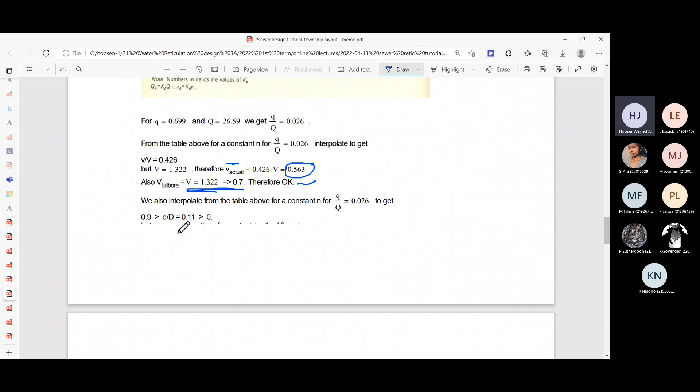So this is where I do the checks in my design to see that yes, that 160 diameter pipeline actually works. So you have it all here in the solution. I've just explained to you how all these values are obtained in this tutorial solution, and you've got all of these answers here. You can go through it and study it in detail. It looks simple when I explain it, but you have to actually work with it yourself, only then will you really fully grasp it.

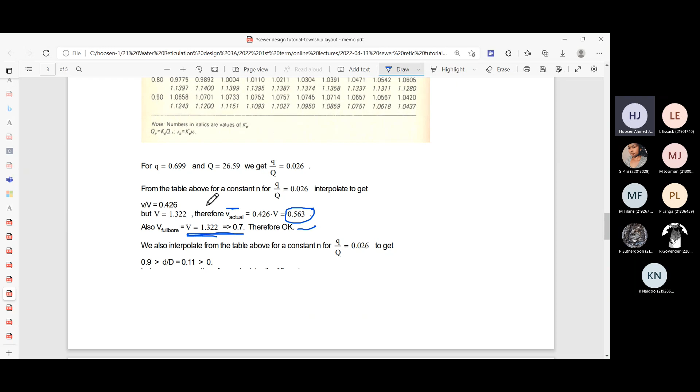So this is the actual design of a sewer reticulation pipeline. We see that our 160 pipeline will work. The flow is not an issue, the slope is not an issue, and the velocity also is not an issue. The depth of flow, yes it is - in the 160 millimeter diameter pipe, the maximum flow depth will only be about 18 millimeters, so that's a very shallow flow in the pipeline. But because it's at the start of the line, there's nothing else we can do. So that's what we will have. The 160 diameter pipeline does work in this particular case.

So I've gone through the full example to show you how we actually design a sewer pipe, and we've gone through the whole thing. Now, yes, one more thing.

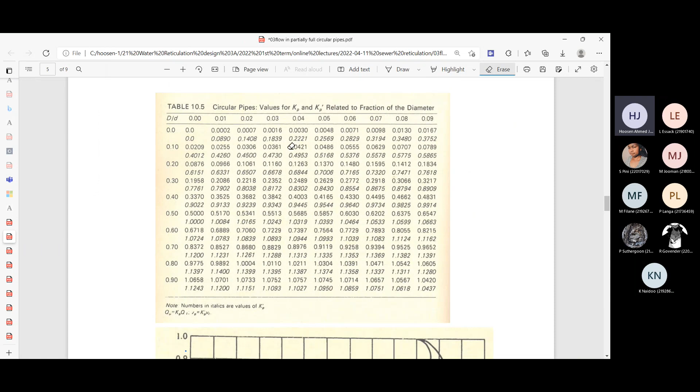Coming back to this table we read those values from and used, this is represented in this graph. You could have read it off from this graph, but you'll find it's not so easy to use. It's much easier and much more accurate to use the table.

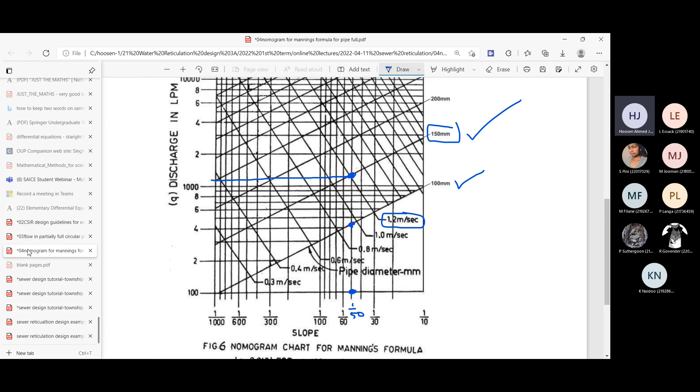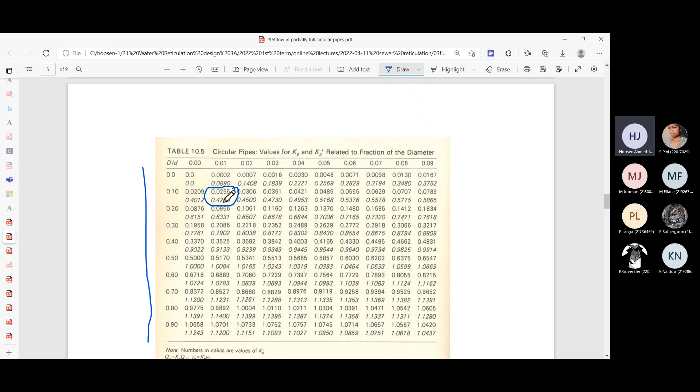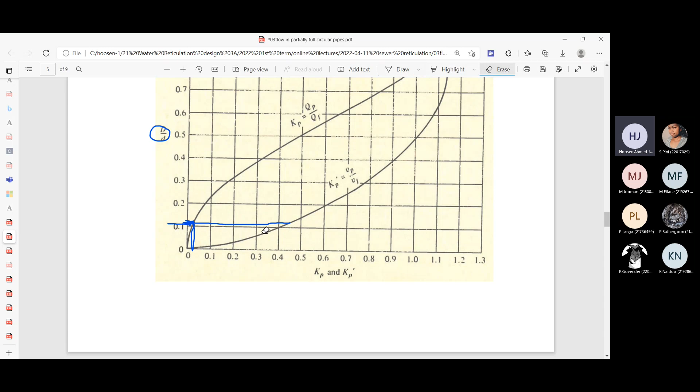If you come down this graph, we had about 0.426 or so in our previous calculation, the V over V was roughly about 0.43 over there. So we can see roughly when we come down on the graph we're in that sort of region. It's possible to use this, but it's much more accurate to use the table values than this graph.

Okay, that brings us to the end of the design of that pipeline. Now that's only one of the many pipelines we've designed in this network. We would then proceed to repeat the whole process for the pipeline between manhole 3 and manhole 4, then again between manhole 4 and the next manhole, and proceed later to the next manhole.

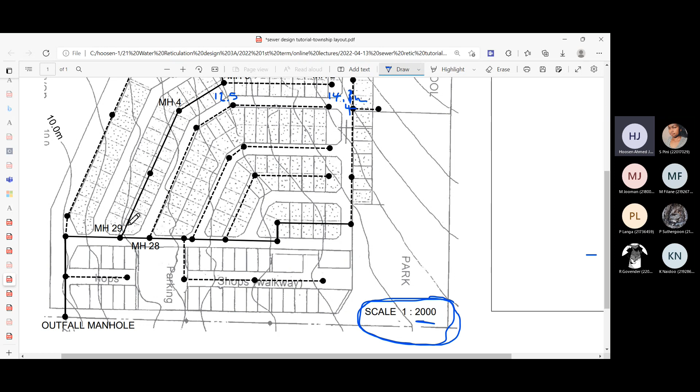For each and every pipeline we would have to do that, and it's best done if doing it manually to set up a spreadsheet in Excel, which would be much quicker. Or the norm in industry today is to use software that works together with your CAD programs. The network would be drawn in CAD, and the add-on package lets you add your design information to design these pipelines.

We're still not complete with the design. We just decided on a pipe size. We still need to draw a long section for that pipeline, because as we've done it, the contractor cannot build it. He doesn't have sufficient information to actually lay that pipeline. That information will be provided on the long section, and I'll cover the long section design in the next lecture.